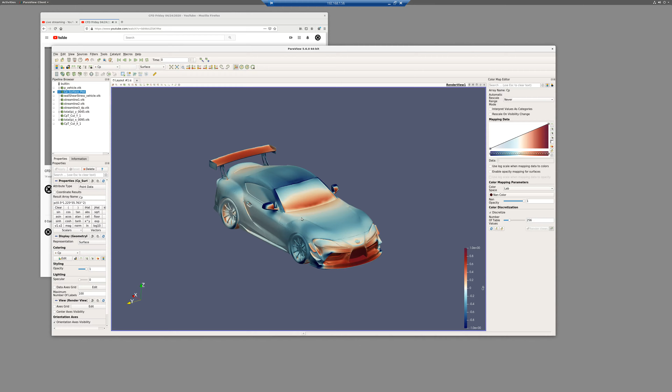Weighing the difference of car conditions on track, where do you want to run the car, and basically you can do the runs to generate 3D maps, and I can actually show you an example of that. I saved a picture somewhere. There we go, here's this. And then I think I put that in documents maybe. Nope.

Here we go. So this is an example of what aero maps look like, just for an example. So if you see something like this, you can see we're looking at 4 different types of configurations. So you have front downforce, total, and then it changes with full screen. All right, full screen.

So full screen, so we are looking at it. Front downforce on - so I'm at the top left graphic. Front downforce in pounds, and then we have ride height in the front, ride height in the rear, and you can see how that changes total downforce. So the color is your front downforce. Sorry, I said total downforce, I meant front downforce. So you can see how that changes.

And then you may move over to the right to the rear downforce. So that changes. You can see how the front ride height and the rear ride height changes the rear downforce, and then you can see total downforce. Same concept: you have the ride heights, and then the downforce. And obviously the rear is making more downforce than the front - you can tell by the numbers on the charts.

And then drag based on the ride heights - obviously, looking at the chart, drag is much less sensitive on the actual ride height map. This ride height map is also just a generic one, I pulled it from past information I have. It's from an open wheel car, but this is not the Supra. So if you think this is Supra, it's not - these numbers would be way too high for the Supra.

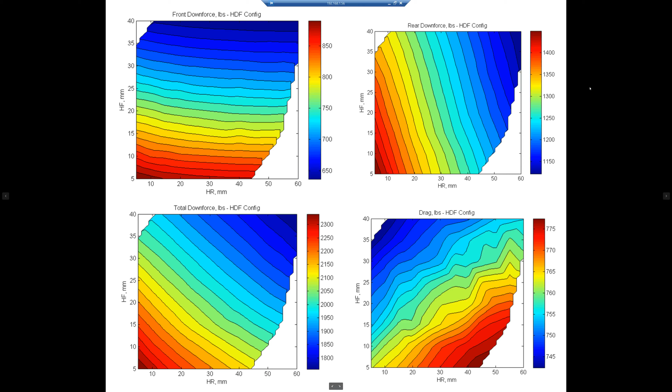Now I gotta figure out how to leave full screen. I don't usually look at pictures on this machine, so.

Another question was LES or RANS. For people who don't know, we mainly run RANS, which is Reynolds Average Navier Stokes. It's regular - when you're talking about RANS, it's steady state, and that's normally what we run. There's also transient RANS, called URANS. But if we're not running steady state, I usually run IDDES, Improved Delayed Detached Eddy Simulation, which treats some areas as unsteady RANS and others as LES. We use either the Spalart-Allmaras or K-Omega SST turbulence models. LES is basically large eddy simulation. The reason we don't run LES is it's very intensive on computing resources, and we don't feel it's necessary for what we're trying to do.

Another question is how front canards work, comparing a couple runs at different heights relative to the rotating wheels. I can go over how we do canards. We might do a case with a few different heights for canards and how it changes things - maybe I'll put that on the list for one of the next cars we develop. I'll make sure to add that, because we do all these runs, but I don't always keep all the data to pull up - I'll output images and data, but I don't keep it past that. So for an actual CFD Friday on that, I'll set out to do it and keep 2 runs at 2 different heights so we can go over the differences.

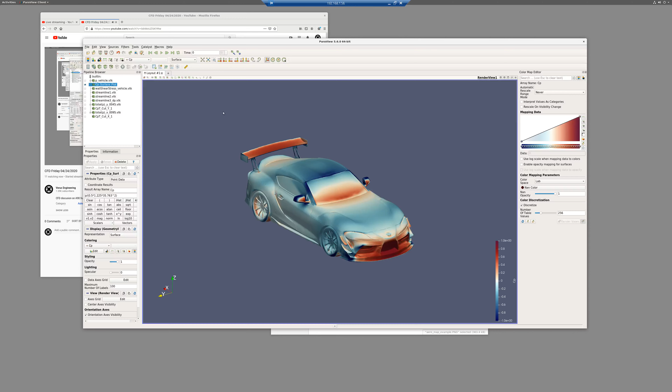How we design front canards might be different than how other people do it, but a lot of the goal is to create vortices off of them to help pull air out of the wheel well. They can be at a high angle of attack - a lot of times you see them at a pretty high angle, like the ones on the Supra. But the flow can stay attached to them because it's going around the bumper, where there's high velocity and low pressure, so it's more likely to stay attached. So they don't actually create a whole lot of downforce themselves - they're mainly used for tuning aero balance, and we use them to help evacuate air out of the wheel wells. I don't know if that's how everybody does it, but that's how we inherently do it.

Another question is to point out how air is managed and manipulated through key areas of the vehicle, like wheel wells, splitters, and underbodies. I'll go over that once I start going over the CFD.

Another question was to explain how barge boards, turning vanes, and other devices work. That's going to be kind of hard on this CFD Friday, since this car doesn't have any barge boards, turning vanes, or anything like that - that was specifically meant for Formula One, like what do those things do. Maybe there's a car we've done barge boards on, so when we do a CFD Friday on that one, I'll get with them on that car and we can go over it then.

Another question - these were the last 3 questions from today, not from the chat. I haven't gone through the chat questions yet.

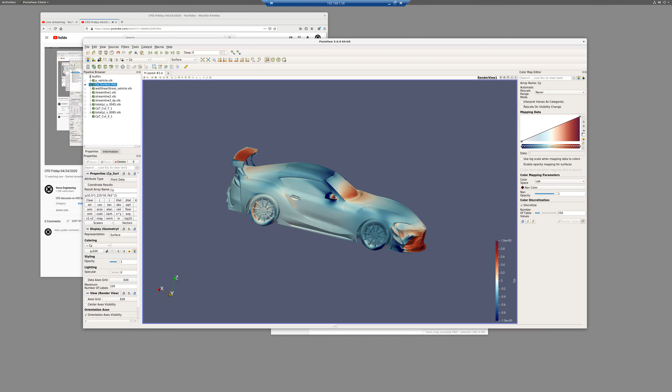Someone asked about CFD on a 2-element wing. I'm not really sure what the question was on that, so if you can clarify, I'll go over that on another CFD Friday. Another question was specifically on the Supra diffuser angle, defined by aero efficiency or exhaust clearance, so I'll flip it over to the diffuser side so we can see what's going on.

So it's always both—it's not defined only by aero efficiency or exhaust clearance. The reason I say both is because there are angles that would make this more or less efficient, but we do have the car in mind. We aren't designing this to cut up the chassis. This isn't a race car build, this is a street car build. So it's always going to be a compromise between aero efficiency and exhaust.

Usually we set it up with the factory exhaust to get as much performance as we can out of it, and then from there we allow the diffuser to adjust down for different exhausts. That sometimes doesn't hurt performance, sometimes it does, and depending on how much you lower it, it'll hurt the performance a little bit.

Another question was about splitter tunnel options—are we exploring making more use of the dive planes? That was specifically about this car. As you can tell, there are no splitter tunnels on this car specifically, and the reason is because we don't think it's needed yet with our current wing. This is the new wing we're coming out with on this car.

It's also coming out on the BRZ—we just released a video on it. It's called the UCW, and it's also coming out for the WRX. We consider it a medium range downforce wing, and we think that's going to be good for the majority of people who are tracking this car.

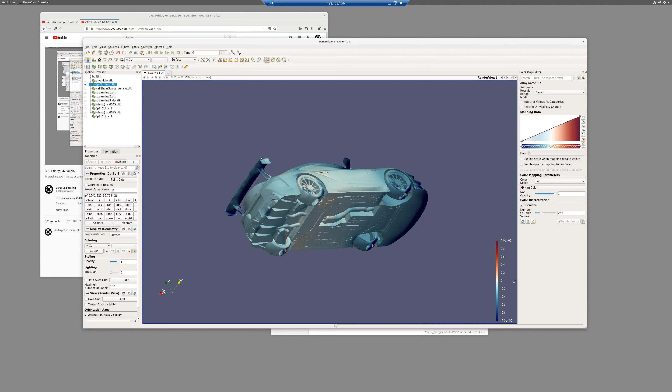Basically if you're looking at the image, blue is low pressure. Depending on where it's located on the car, it's either creating downforce or lift. On the bottom side, if you're looking at blue, it's creating downforce. Red is higher pressure than ambient, so it's going to either create lift if it's on the bottom side, or downforce on the top side. The primary way to think of that is just looking at the wing—the wing is blue on the bottom side, wanting to pull it down, and red mostly on the top, which is wanting to push it down. That's the easiest way to think of that.

There's also CPX and CPZ, which I output a lot of times for me to specifically look at. These are just dimensionless numbers, so you can look at it normal to either the x-axis, which will be drag. In our case of how we set it up, X goes this way, Y goes this way, Z goes up—those are standard coordinate systems for things like airplanes and race cars. So if you're making negative force in the Z direction, that is downforce. Positive force in the Z direction is lift. Positive force in the X direction is drag.

Just so we're talking about the same thing, another one would be wall shear stress. So this, when it loads, this is a plot of wall shear stress.

This is also viewed with what's called an LIC plot, which is a line integral convolution used to basically visualize oil flow on the car. If you pay attention to any sort of engineering on Formula One, you'll see they actually use this fluid, usually green, and you can see streaks in it showing how the air is flowing all around the car. So that's in essence what we're looking at.

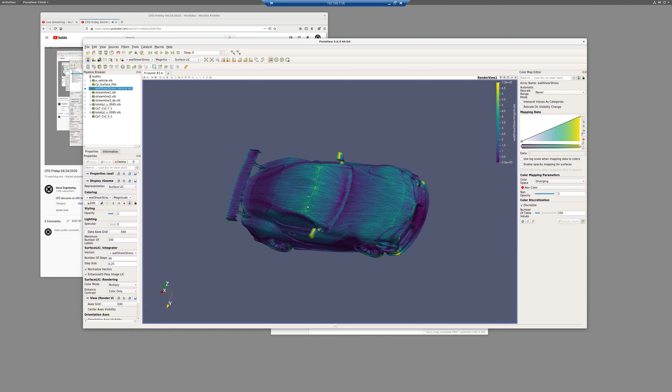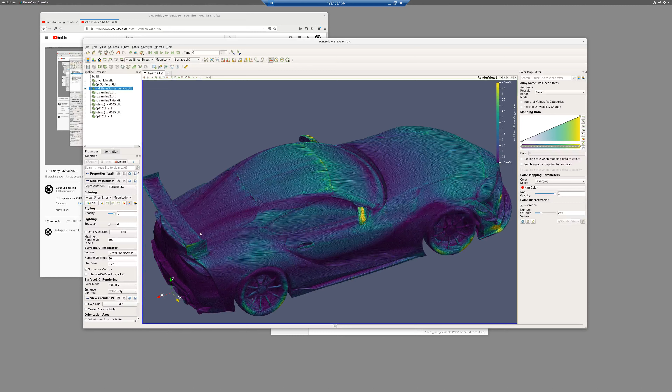So you can kind of see how the air is flowing. If I zoom in right up here, you see some interesting stuff. It's also very computer intensive to generate these images, which is why I usually script them. But you can see how a vortex is actually coming off here, and you can see it coming down the line along here. There's some separation off the wheel well right here and down the side, and you can see basically how the air is flowing around the Supra.

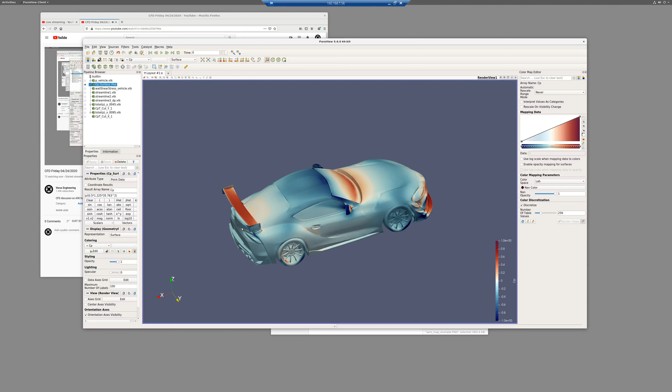Now another plot, well not another plot — we'll go back to CP real quick, zoom out, and then go over streamlines. Streamlines are great to show people what's going on with the airflow. I don't use it a whole lot when doing analysis testing; I feel there are better plots to use, but streamlines are good for the average person to look at and see what's going on. You can see the airflow coming off the diffuser, going up and out from the wing.

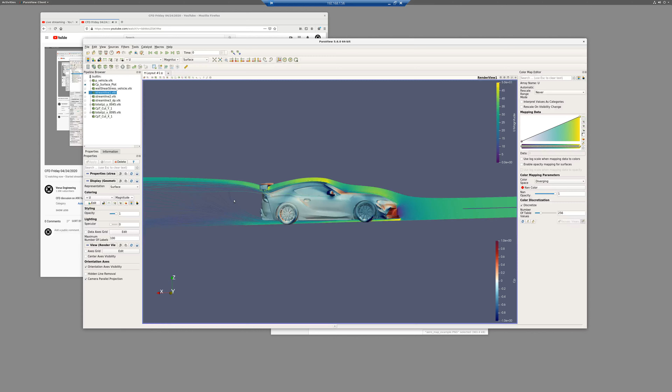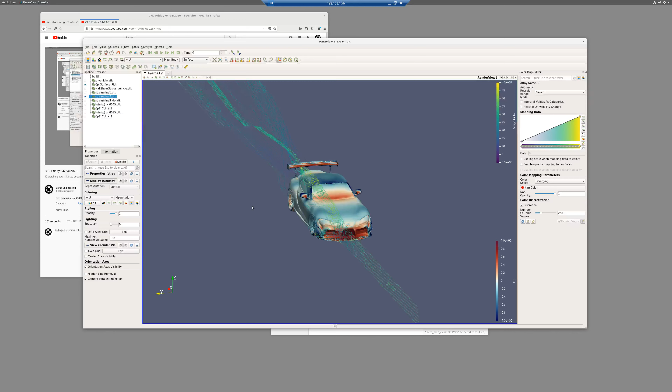This is streamline one down the center of the car, pretty simple — it might even be slightly offset from the center, but you can kind of see what's going on. I output a few different streamlines, so I don't know exactly which. This one's even more offset, and you can see the airflow coming off over here. And then the last one is for the dive planes, so you can see how the airflow goes off the dive planes.

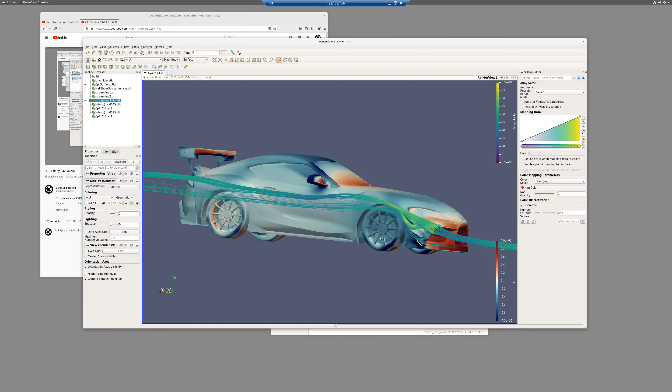I think this will probably be the most useful one for people, so you can actually see how the airflow is attached. Let me drag it over so people on Facebook and Instagram can see what's going on a little better. Sorry, it gets a little choppy from moving it around, but you can see how the airflow actually fully stays attached up the dive plane as it goes up and around, which is pretty cool to see.

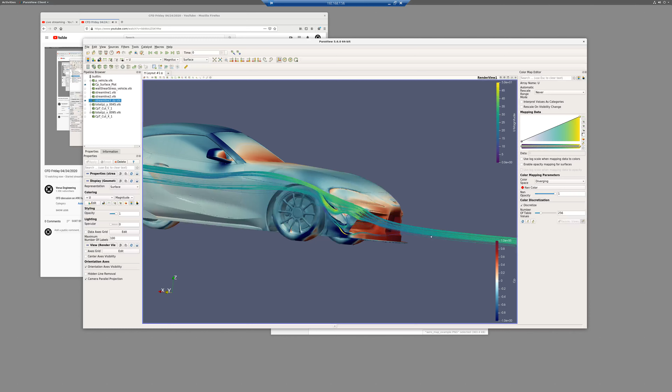So that is streamlines. Another one we look at is cut plots. I use cut plots quite a bit — I usually find those more useful than streamlines. Usually how I look at cut plots is in terms of the total pressure coefficient, which you'll see as CPT. You'll see that on the screen, it's CPT right there. Anytime you see that, it's similar to CP — it's a dimensionless number used to describe the total energy of the airstream. Mathematically, it's the sum of the static pressure and dynamic pressure.

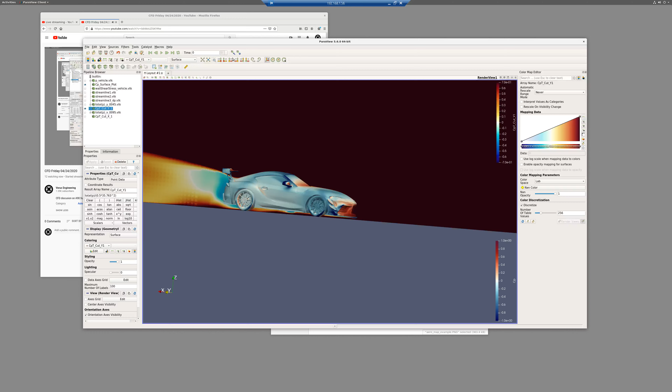In the red area, it's got all the energy. In the areas that aren't red, some energy has been used up. There's more to this — maybe we'll do a specific video on cut plots and CPT one day where you can see more of what's going on and how we make decisions, but that's the broad overview for now. This is a side view — let me go normal to the actual side view so you can really see the stream, and then zoom in.

Sorry, it's kind of big. This is why I have all my stuff scripted, so it doesn't take so long to do this. And there we go, finding it. That's why I keep it all scripted. It makes this easier, then I don't actually have to scroll through all of this stuff. I just have it automatically output images.

So you can see this is basically the energy used up on the back side of the car. You can see how this is a good way to look at it. People a lot of times ask us how do you know where to put the rear wing, and how do you know how high it needs to be, or its location. This would be a good point. The wing could actually go a little bit lower on the car based on this.

However, that's not the full picture. Some of the other things you would also want to look at is the interaction between the actual car. So if we lowered the wing, you would still have good airflow to it, but that low pressure region underneath there would interact with the car, which would lower the pressure on the top side of the car, creating lift, and you would lose some of that low pressure on the bottom of the wing, so you would actually lose downforce. So you would gain lift and lose downforce. That's one thing you have to look at.

Another thing you have to look at is clean air. You are getting plenty of clean air to the wing right here just looking at the CPT plot, because you can see it's all red. All the way around there you can see perfectly good airflow. Obviously a bad place to put a wing would be back in this area, that'd be terrible because you wouldn't get very good airflow at all. However, don't confuse that with necessarily a diffuser, because what's going on underneath the car is a little bit different, and you can't look at CPT the same way, which is why I'd do a totally different thing on just the underbody CPT plot. It's a good way to look at vortices and things like that.

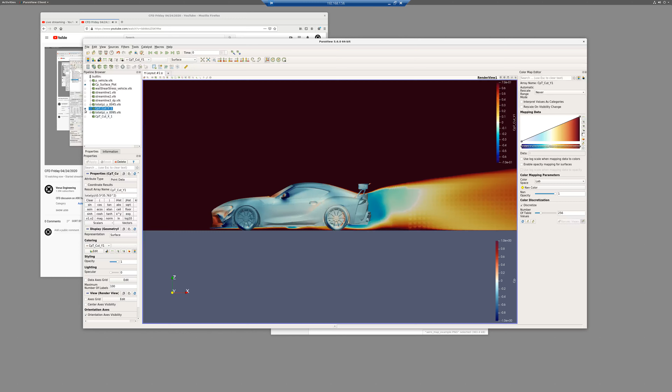I do have another CPT plot. This is a cut on the y-axis, so straight down the center of the car. The other one I have is just behind the rear wing, and when I'm talking about visualizing vortices, this will show how you can kind of see them.

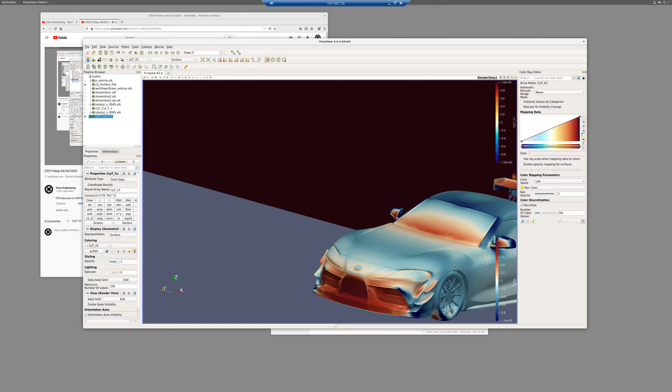Let me do a close-up of that if I can move this how I want to. Okay, I need to zoom out, apparently I don't remember these button clicks very well. Maybe it's shift, drag it. No, that's rotate.

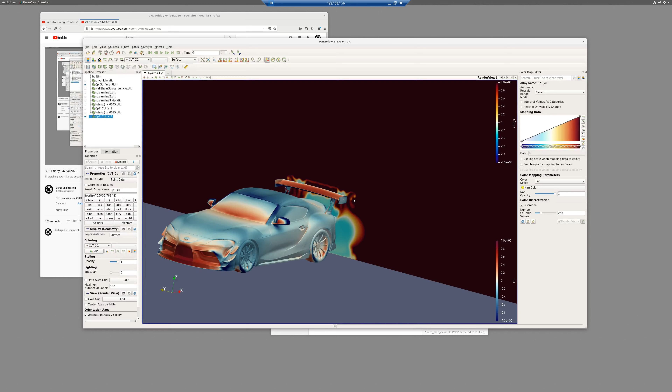There we go. Now moving it more to the center so we can focus on the rear wing. This is where you can really start to visualize what's going on behind the car, and you can see how the vortex is coming off the end plate right here. You can see it coming around and curling right here, that's just a vortex coming off the end plate.

That's why on the V1X we have slots on the end plates that decrease that vortex, which actually has a lot of benefits to it, and maybe I'll do a complete CFD Friday on that wing on a car. We put that wing on quite a bit of Porsches, so maybe I can do one specifically on a Porsche setup. You do lose a little bit of downforce with slots like that sometimes, not always, but sometimes.

Usually when I say stuff, it's usually in aerodynamic terms, it's usually sometimes. There's always exceptions to the rules, and they're only soft rules. It doesn't mean this is always what happens, but usually when you have slots on end plates, you lose a little bit of downforce, but you gain efficiency because you're cutting down on that vortex coming off the wing, which is causing drag. That's usually what those are for. Now in Formula 1 they've got some fancy stuff going on that they do besides that, but in generic terms, that's kind of what we're looking at.

So these are kind of some of the images. I'm going to go over, I guess there are some questions probably on YouTube that I will look at, and then also on the other ones.

If you have the time to answer, would it be curious to see the effect of completely removing the side mirrors? We're actually going to be doing some tests with stuff like that. I can tell you usually the forces on side mirrors aren't super large, though obviously different cars it affects more. I usually pull data from the mirrors, so I could pull that up and give generics. You can actually hand calculate a lot of times how much drag you're going to have on the mirrors too.

If you open up books on fluid mechanics or even race car aerodynamics, they'll have generic coefficient of drag shapes per shape. A lot of times a mirror would be seen like a half circle, or something similar, and you can use the force equation with the coefficient of drag, which is just 1/2 rho v squared CDA. So you just have to know the area, and you can calculate that pretty easily with a basic tape measure using that shape.

Rho is just density, and you could calculate it at different velocities. I'd recommend doing it in metric, since density in metric is easier for the average person to understand than in English units, because it's slugs and stuff, which is weird. Otherwise, 1.225 is what we usually use for standard density, in kilograms per meter cubed, and you just need your velocity in meters per second. You can basically make a table in Excel pretty easily and calculate generic differences for the mirrors.

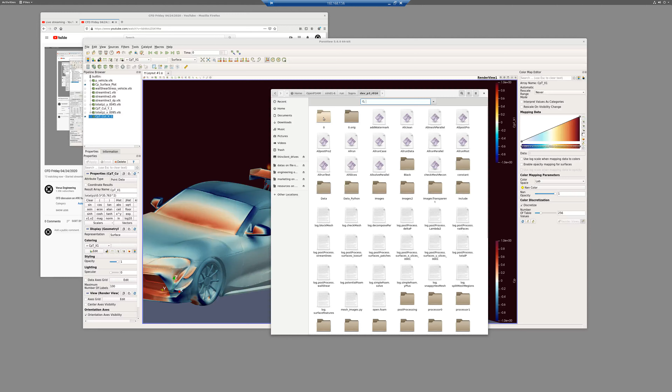So we're going into the file. This is where you set up your boundary conditions, at least in OpenFOAM. These are the file locations, basically set up by what turbulence model you're using. Most likely you're asking about the velocity stuff, so this is where you can see what's going on the scripting side of things.

So these are the wheels, the rotation, the locations. The vehicle is set as a no-slip, and then the wheels are set as rotating wall velocities. This was not done using multiple reference frames, just because I don't always find that needed. Sometimes it is, and sometimes we'll run it, but it's not always needed. That's just how that's set up.

So let me see here, what are some of the other questions? Do you have a cut plot for the GT86? Yeah, I do have CPT plots for the GT86, just not on the machine right now. We could probably do that.

And then somebody with a funny name on here asks, would a more swoopy swan neck work better? I'm going to say that's probably Tom. Tom seems like that's a question he would ask, because he's a friend of ours. He talks about swoopy swan necks a lot.

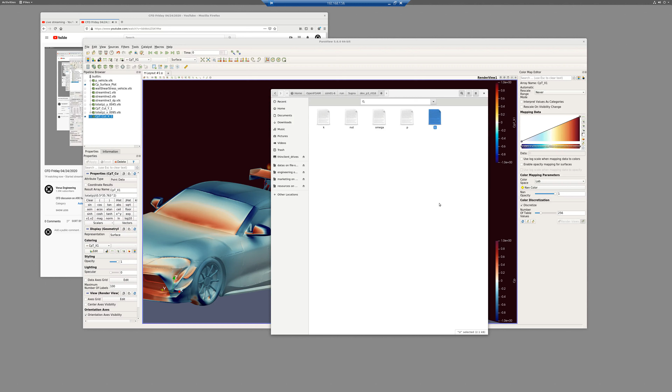Swan neck is better than bottom mount for efficiency, but it's also a lot more difficult to get good mounting solutions. So that's why on this wing we came up with a bottom mount solution, just because it simplifies things and makes it easier to actually get mounting that's strong enough.

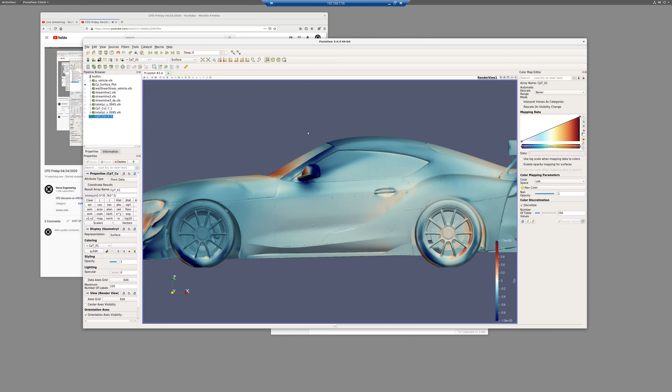With the problem with the swan neck wing, I can hopefully show you a little bit why. Let me rotate, let me get this in the Y view. Alright, so say we were going to mount this wing. Oh man, zooming in, it's doing all kinds of weird stuff. Okay, zoom back out. Sorry, that's the problem with having big files opened. Why is this not zooming? Gotta wait for it to load. Okay, there we go, super far back.

Alright, so with a bottom mount, the load's coming on the wing right here, look at my mouse. If you're applying load, it's basically pushing down. You can assume it's pressing down at the location called the center of pressure, which I don't know exactly where it's located right now, but we'll assume it's right here. So you'd have a force pressing down right here, so all of that load is getting pushed straight down, and this whole mount is pushing down. And then you have drag, which goes in the X direction, pulling it this way.

So you're probably getting maybe a little upward pull here, but if you are, it's very minor, because you still have a force being pushed down. This wing's pretty efficient, so it makes more downforce than drag. It's going to depend on the moments, but overall it's going to be pushing it down.

The problem with the swan neck, though, is you're putting the mounts at the top, and to actually have something that looks good, it's going to push the wing a little bit more rearward. So it's coming up like this and over. And so when the wing would actually be pushing down back here, which is going to want to pull up this front location, that actually makes it a lot more difficult to design a swan neck style for mounting, especially when it mounts to the trunk lid of a car.

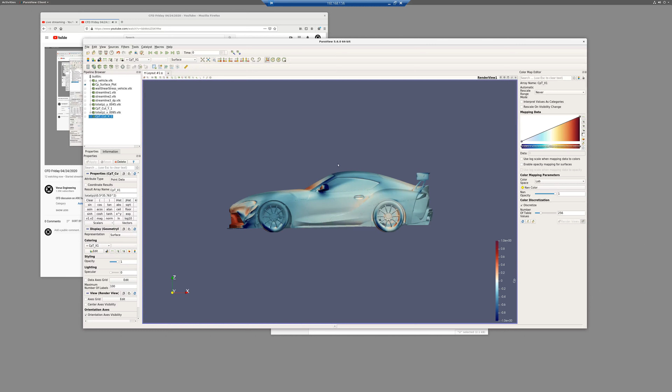Have you looked into how effective it would be to use the blocked off vents on the Supra? Oh yeah, Eric did a big rant on this. The vents aren't useful at all. Even if we made them useful, it'd be... I'm not saying that if we opened it up and tried to go about it we couldn't make them useful and do something, but it would require a crap ton of work to make anything useful. Well, show them that the top one's like a pile of garbage. Oh well, yeah, it's high pressure there, that one's high pressure, definitely not the lowest pressure behind it. Right there is definitely not good. You might get some with wipers coming out here, yeah you could probably make them work. I don't know, the door one, I don't know what they're doing with that. That's just like a big open cavity, like what you'd have on a Porsche or something, with an engine intake there or something.

But someone's asking if we have a dealer in Korea. We do have a dealer in Korea. Clay, what's our Korean dealer? M7 Industries, M7 Industries is our Korean dealer. Clay is pretty good friends with the guys over there, they just did a pretty cool video on some of our Miata parts. So I'd hit them up if you're looking for that kind of stuff.

When will you guys have the 2020 A90 Supra rear diffuser? We do have prototypes of it, but those are all gone. We have one on our car. We're looking at 6 to 8 weeks till those are done. It's somewhat of a process to get that all done because they go through a few different steps between cutting the sheet metal, bending the sheet metal, riveting the sheet metal, because our production units are all hard riveted, which is super cool, powder coated, and then they get silk screened.

We're hoping that industry in the United States starts coming back a little bit more and things don't slow down more, so it can all get done. They are all made stateside through a few different processes, so hopefully sometime soon they will be ready. Clay said 6 to 8 weeks, which is probably fairly accurate.